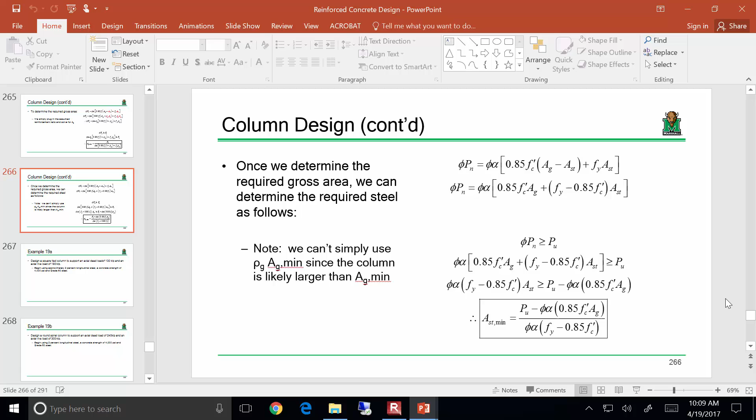All right, so, okay, all right. This is really important because I guarantee you, I'm going to say this, I'm going to use my words and say it. I guarantee you there's going to be folks on the exam who's, oh yeah, I wasn't paying attention, so I'm just going to do this. You want to pay attention to this.

Okay, so when you design a column, the first thing you're going to do once you determine your axial load is you're going to solve for the gross area. Now, in order to solve for the gross area, you have got to guess a reinforcement ratio. Unless otherwise stated, 0.02 is a pretty good place to start. You solve for your required gross area. You do not take your designed column and just multiply it by 0.02 to get your steel. That's not how it works, okay?

Once you have a gross area for your column, you can directly solve for how much steel you need. Sometimes it may be more than the 0.02, sometimes it may be less than 0.02.

The idea of the 0.02 is to just get the column size. Once you get the column size, you can then solve for how much steel you need. Make sense? Now typically you want to round column dimensions to the nearest inch, maybe nearest 2 inches, 18 inches, 12 inches, 6, something like that. There's nothing wrong with doing a calculation and getting a column size of, let's say, a dimension of 18.3. There's nothing wrong with rounding that down and using 18, because what you're then going to do is take that real column size and determine how much steel you need.

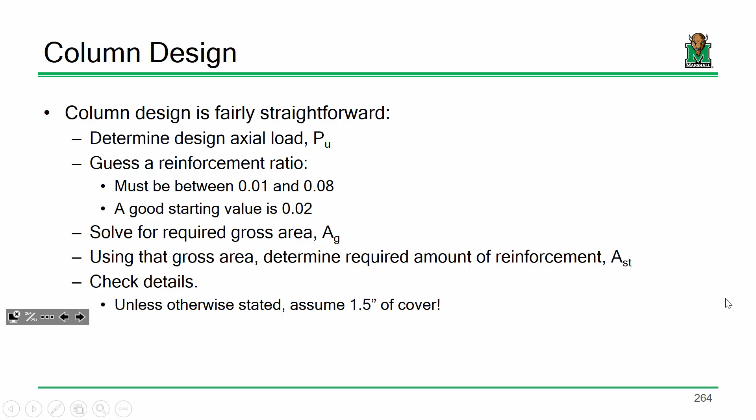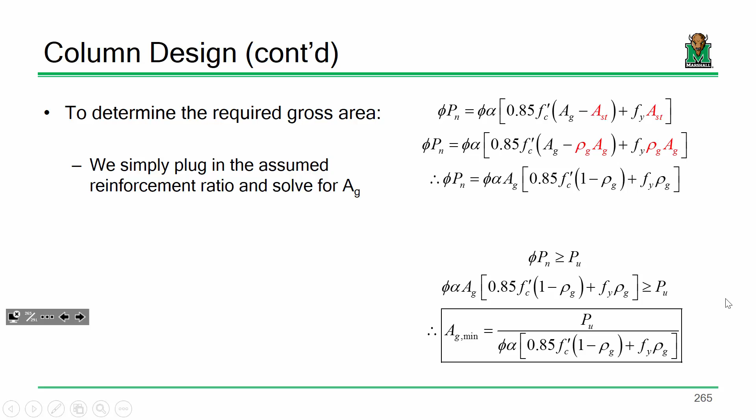Might be a stupid question, but would it be more conservative to round down to 18 or round up to 20? Well, it doesn't matter—let me answer it this way. You use your reinforcement ratio to get your minimum gross area and use that to select a column dimension. Once you've got the column dimension you want to go with, you plug that into the equation to solve for the required amount of steel. So you're asking if it's more or less conservative—I'd say it really doesn't matter, because ultimately you're going to use the actual column dimensions to solve for how much steel you need. Does that make sense? So then your reinforcement ratio will be different from what you originally had. Exactly right. That's another way of explaining why you can't use the 0.02 directly—your reinforcement ratio at the end will be different.

Although that's the case with just about every beam we've ever designed. You use a reinforcement ratio to get a level of steel, however much area you need, and then you always end up picking a little bit more, so it changes a little bit. But I do see what you're saying, and that is another way of looking at it. Sound good?

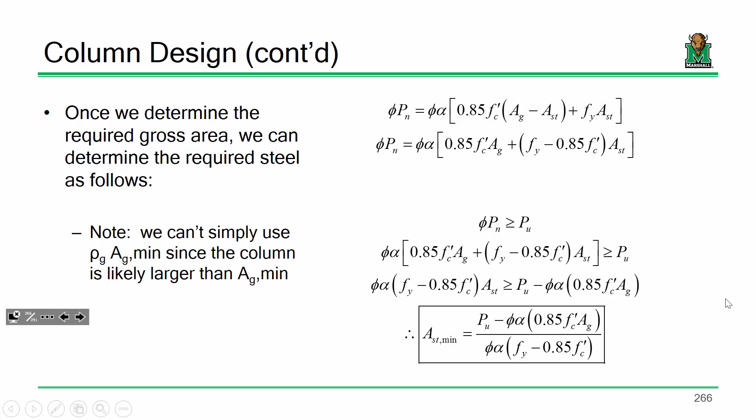Okay, so we're going to design a square column, and then we're going to design a spiral column, or a round spiral column. Design a square tied column to support an axial dead load of 130 kips and an axial live load of 180 kips. We're going to begin using a rho value of 0.02, 4 KSI concrete, 60 KSI steel, and then we'll work from there.

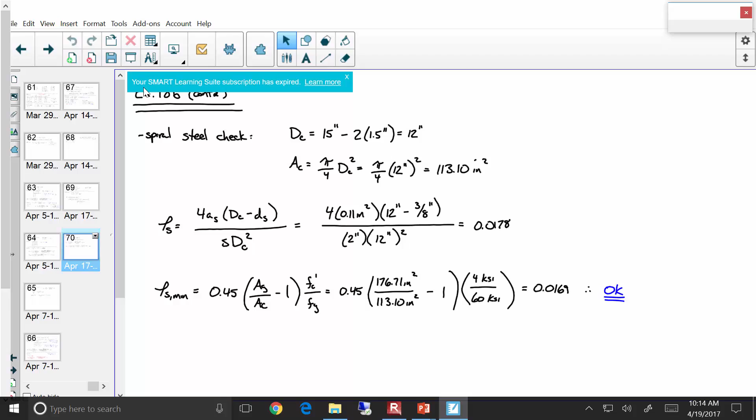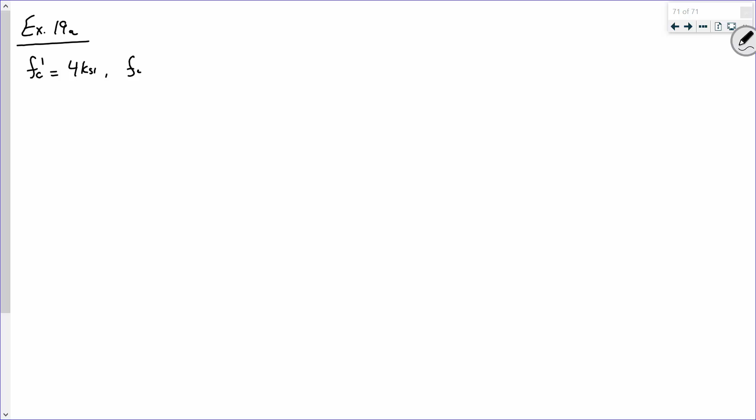Example 19A. So first thing, we know that FC prime is 4 KSI, we know that Fy is 60 KSI, we know that our rho G we're going to take to be about 0.02, which basically just means that's the starting value for the purposes of design. And then we've got a dead load of 130 kips and a live load of 180.

So somebody help me out—what's the first step? Factored loads. Bless you. It's that time, isn't it? Seasons change, and that brings the allergies.

1.2 dead plus 1.6 live: 1.2 times 130 plus 1.6 times 180 yields what answer? 444.

All right, now we are using tied columns, so essentially we're going to use a square column. So what does that mean for our safety factor and our eccentricity factor? Got to go through your notes. Oh no. The what? 0.8, and the phi value? There we go.

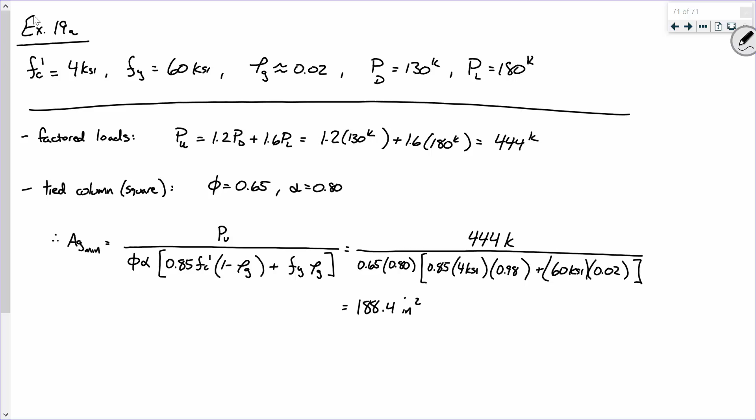Is there a second on that 188.4? I heard some discussion over a 188.5. All right, okay. All right.

Okay, all right. Help me out with some basic geometry. What was the shape of this column again? Okay, now if this area is 188.4 square inches, how am I going to determine what size column is necessary, or what are the dimensions of that column?

You all are really excited about exponents.

All right, guys, everybody, come on. Everybody, tighten it up a little bit. Come on now.

13.73 inches. Relax a little bit. It'll be all right. 13.73 inches. Do I have a second on that?

All right. Now, typically, when you're in column design mode, you're usually wanting to round to the nearest inch. And because of the ease of forms and pre-made forms and things like that, I usually like to keep it to the nearest even inch, like 16 inches, 18 inches, something like that. So if this is my minimum required column dimension, again, based on an assumed reinforcement ratio, what would you use? There we go. So let's use a 14 by 14 column.

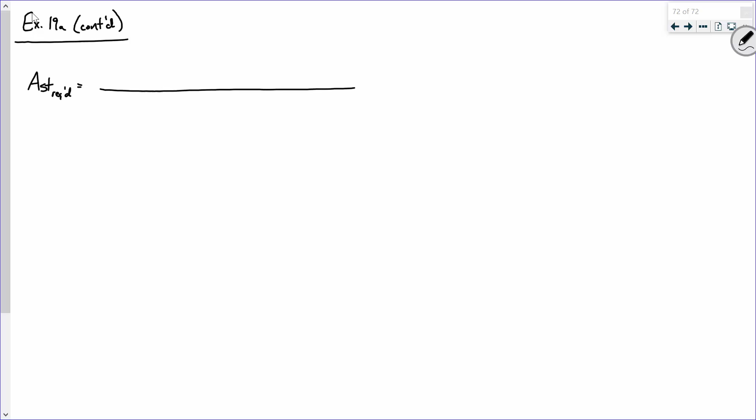Behavior. Awesome stuff. Now, what? I don't know what's going on. The personification of steel and concrete.

I'm just going to write my equation. Okay. All right, so here's your equation for solving for the required amount of steel. Again, it's just phi Pn has to be greater than or equal to Pu, solving for the steel. That's all that is. It's nothing really that complicated. So

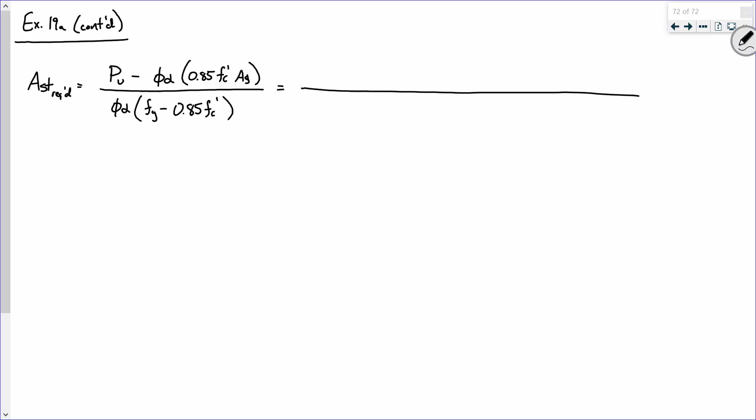plug and chug, we got 444 kips minus 0.65, 0.8, 0.85, 4 KSI, 196. Now again, we're not using what we solved for, we're using the updated column dimensions.

Your alphas look like subscript A's. I was like, where is B? Oh, it's not a B. Yes, fish. You know, y'all are hurting my feelings with my handwriting. I've already dealt with that with other classes. Yeah, I'm sure you don't.

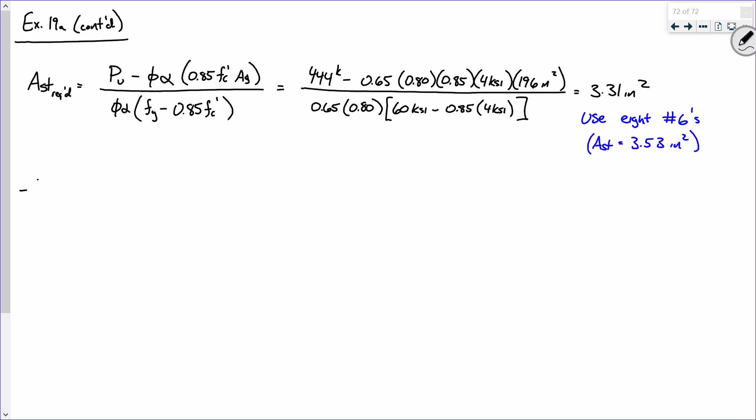Why a number 3? No, there's a reason for that. There we go. Longitudinal bars. Well, that was a correct guess.

All right, settle down. Goodness. Yes. Guys.

Okay, now let me ask you this. If you're in design mode, okay, and you want to design a column, you're trying to design the most economical column that you can. Let me ask you a question. When sizing that column and spacing out this reinforcement, let's talk about the tie reinforcement. Are you wanting to use maximum tie spacing or minimum tie spacing? Why are you wanting to use maximum? Exactly right. So let's use maximum tie spacing.

What is the maximum tie spacing that we can use? No, that's the minimum. All right, let's take it one at a time. Mr. Schaffer, what's the first one? 48 tie bar diameter. So what is that, 48 times what? 3/8. So what is 48 times 3/8?

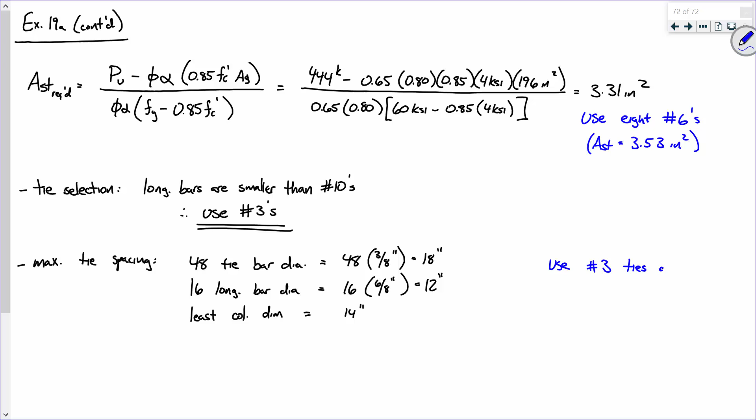So I suggest that we use number 3 ties at 12 inches. Got to go off the minimum. So I propose that our column should look like this.

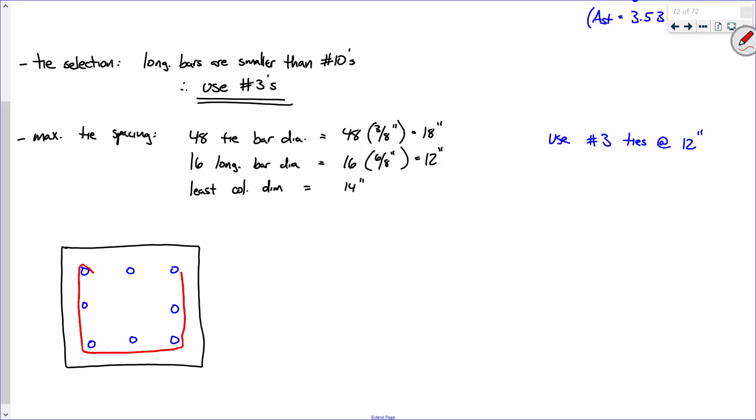Bless you. All right, so what do you think we ought to use for a cover? Unless otherwise stated, that's a good one.

And there's your answer. However, there's two things we need to check. We know our tie spacing works—we selected it based off the requirements. We've got two things left to check. The first thing we technically need to check is rho actual, so that's AST over AG—what was the area of the steel we actually picked, divided by 196. What do we get? There's no units on this.

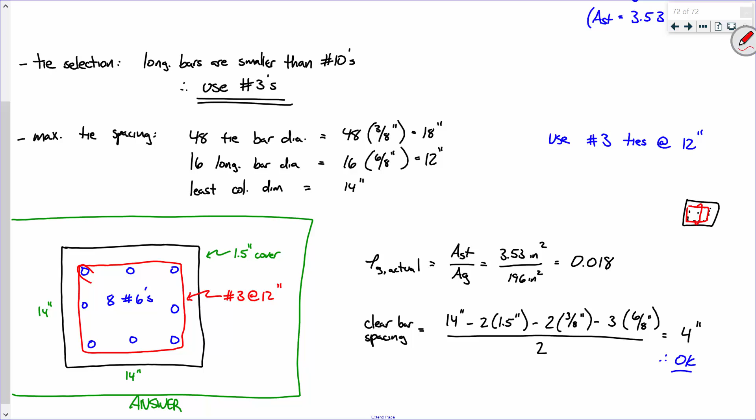We're talking about a freestanding column. So you never put a point bar in a freestanding column? No. Well, then just use a steel column—the W14 by 800. It'll work, I promise. Okay. Does this make sense? Everybody good with this?

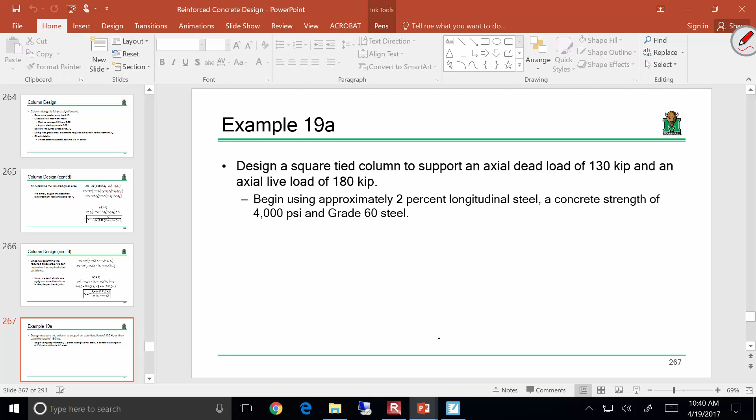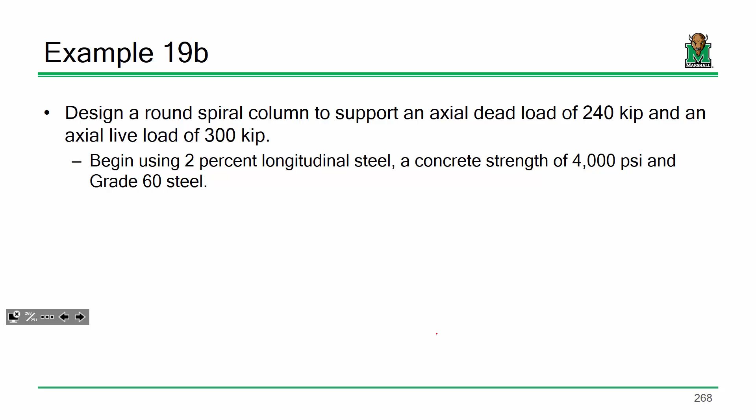Okay, I do want to at least get the next example started. This example is pretty straightforward, only it's a circle. The design expressions don't change, but you just got to make sure you're doing your math appropriately. We have a round spiral column to support an axial dead load of 240 and an axial live load of 300. What two values right off the bat changed from the previous example to this one? Phi and alpha—they're different, right? The load changed, obviously, but I'm talking about from a design conceptual standpoint. So, but everybody saw that too. We're still going to start with the same assumption for material and all that, so let's just go to work.

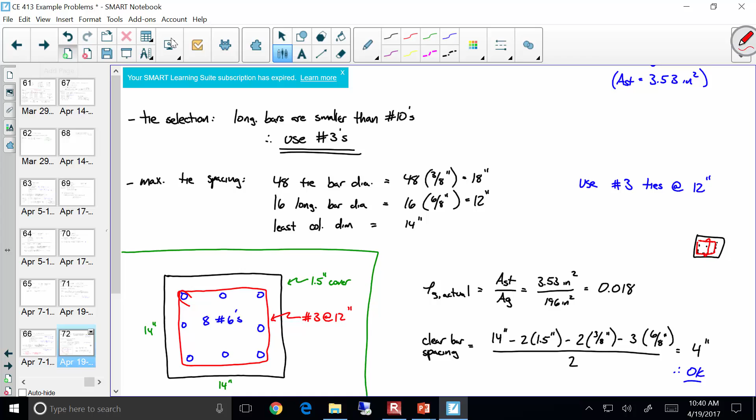73 pages of calcs. Whew. What is this, 19B? Yeah.

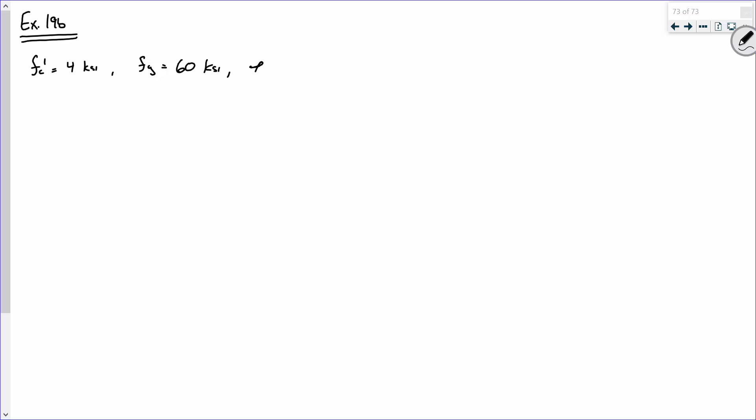And what was the dead load? And the live load was 300, right?

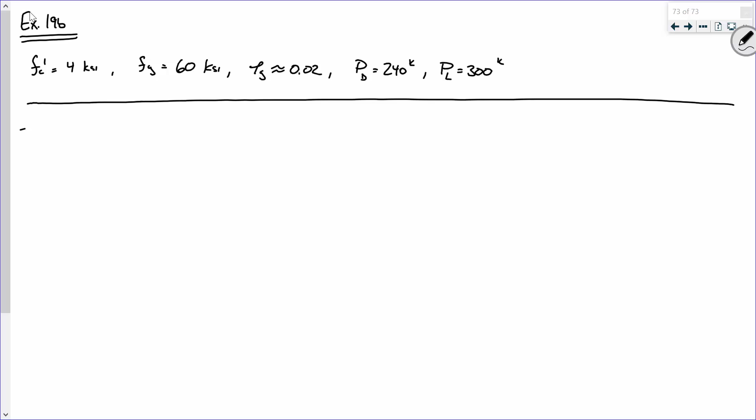There you go, they're learning. See, that's the thing. If I make a mistake and you correct me, it must have been that you learned something. If we make a mistake and you correct us, you're just doing your job. But when you're correcting me, that means you learned the concept. That's probably true. We're doing your job.

Either way, see, I've done that by design in some things. Like I'll write something and say, is that right? And you go, no, you forgot the unit conversion. It's like, man, now they're getting it. No, professors only do that when they make a mistake and they don't want to admit they made the mistake.

Oh, I'm thinking about the final. I'm thinking about some curveballs I could throw out there. You make two tests, one for people who need curveballs and one for the straight. So you want a curveball, right? Yes.

So what do we got for this? You all can plug and chug and tell me what you get. 768 kips. Do I have a second on that?

All right, so what is phi and alpha? Okay, now, so for the column, again, the equations, they don't change. Bless you. It's still, hold on.

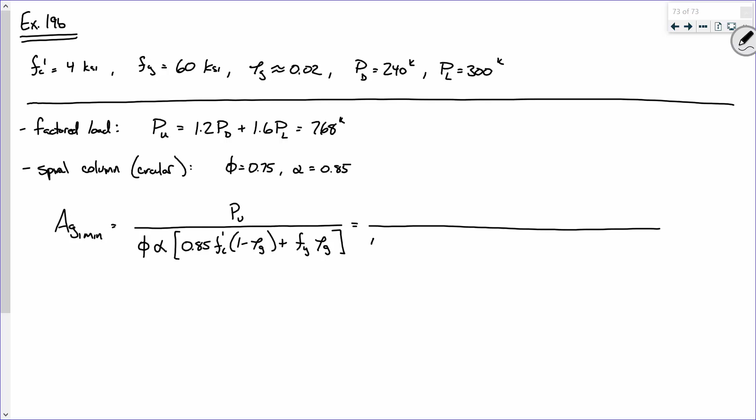So one thing I want to point out right here, okay? So phi is 0.75, alpha is 0.85. When you do the multiplication in brackets, you're going to have a 0.85 again. Don't let that freak you out. That's supposed to be there.

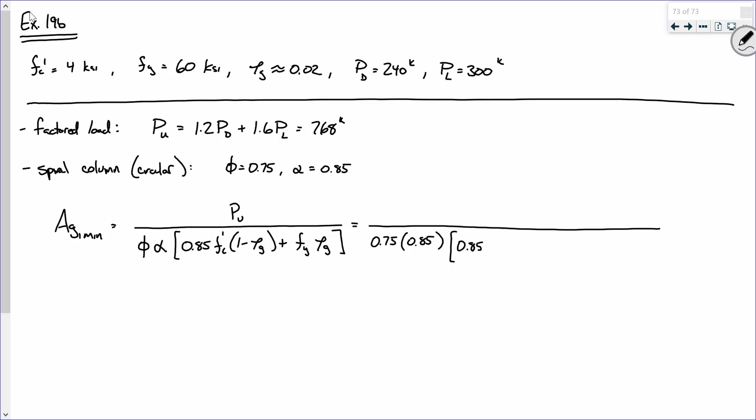Oh, plug and chug. And then instead of 1 minus rho, I'll just put the 0.98. And then 768 kips. All right, so is everybody okay with that, the 0.98?

What's it? My number seems wrong, but then we're doing the area. Yeah, that'd be a big column.

So anybody, do you have a number for this? Do I have a second on that? Okay, now, so that means we do this, right? No. Oh, there we go. There we go.

So actually, instead of B, I'll use the diameter. I propose that we compute the minimum diameter by saying 4 AG min divided by pi, square root. What the?

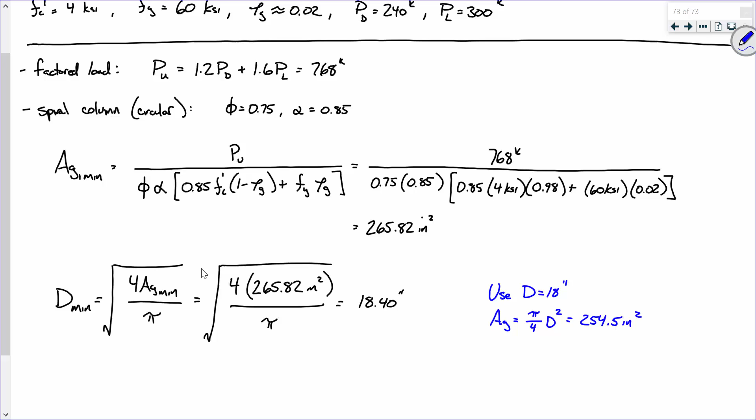Sound good? Now, let's then calculate the required area of steel, or AST min.

So PU divide, or minus phi alpha, 0.85, FC prime, AG divided by phi alpha, Fy minus 0.85

FC prime. So we don't have to put the area minimum requirements since we changed the diameter. Like we do that calculation to figure out what our diameter or base should be around. Yeah, again, we're using this value to solve for the required amount of steel. So that's why that's valid. You see what I mean? If you took this and multiplied it by 0.02, that would not be accurate.

So watch this, 0.75, 0.85, 0.85 again. That's okay. Minus 0.85.